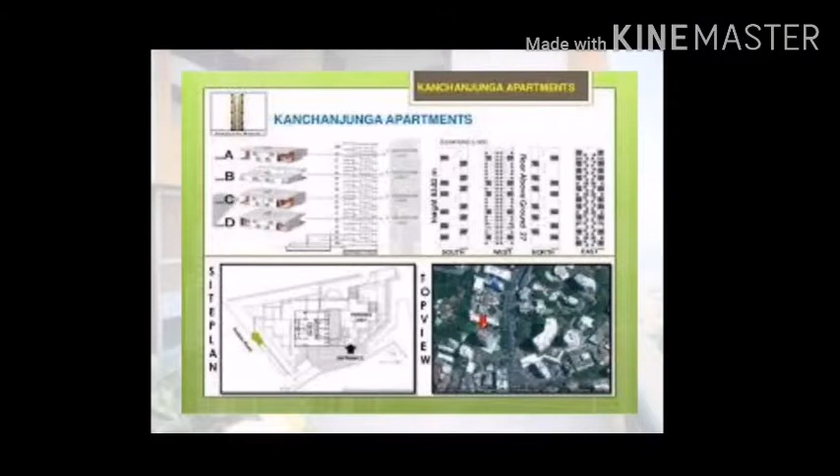My next topic is the work of Charles Correa's first apartment building in Bombay, India: the Kanchanjunga apartment. The plan shown and the Google Map show the top view of the Kanchanjunga apartment, its elevations and plan.

Introduction: the Kanchanjunga apartment project started in 1970 and was completed in 1983. The structure type is a high-rise building, located in Cumballa Hill, Mumbai, India, with a height of 84 meters and 27 floors.

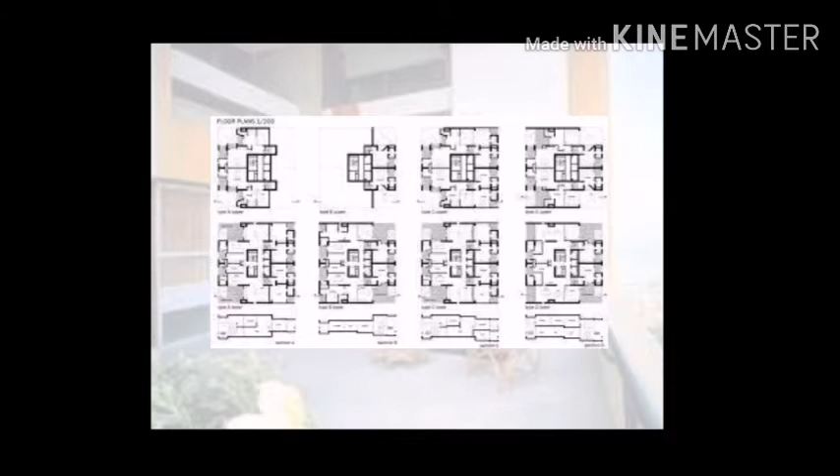The slide shows the various types of plans of categories A, B, C of the flats. Plans and sections of the Kanchanjunga apartment.

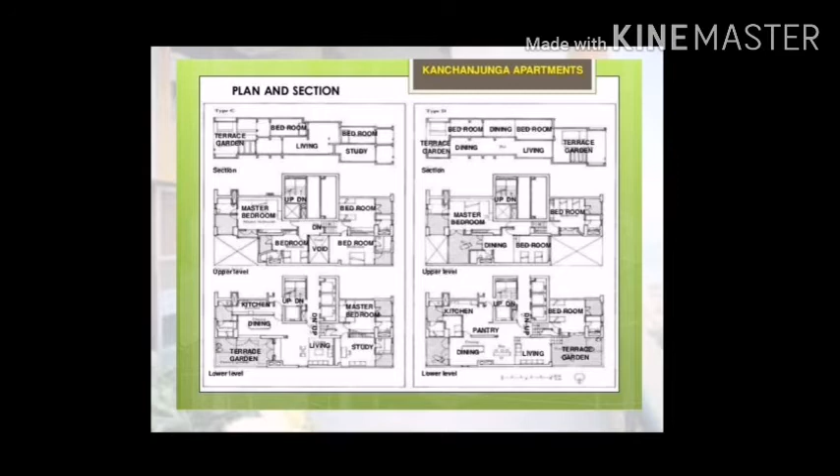The section shows the terrace garden, bedroom, living room, study room, and type D also shows various terrace gardens. Every flat has a separate terrace garden, living space, balcony, and master bedroom, with an internal stair provided for the upper floor, and the plan is like a duplex pattern.

Now I will discuss the infrastructure of this building. The building has been oriented east and west to catch the sea breeze and to open up to the best view of the city.

Unfortunately, these are also the directions of the hot sun and heavy monsoon rain. So the old bungalow solved this problem by wrapping a protective layer of veranda around the main living area, thus providing the occupant with two lines of defense against elements like heavy rain and hot sun.

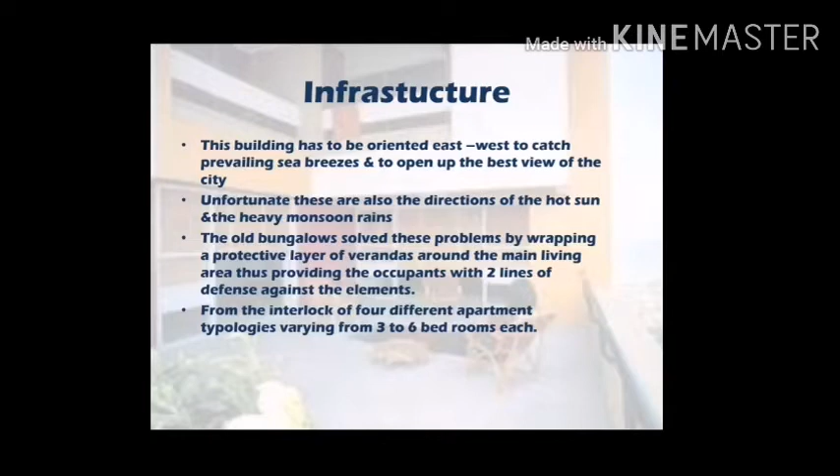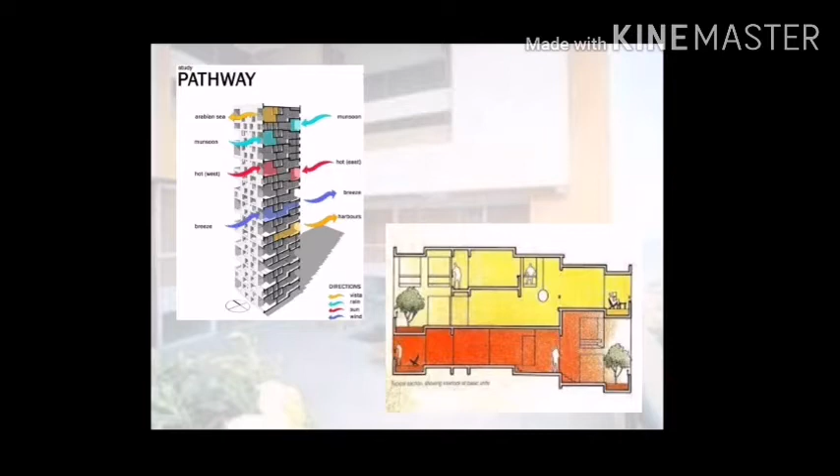From the interlocking of four different apartments, the typology varies from 3 to 6 bedrooms each. The elevation shows the breeze, harbors, hot sun, monsoon, Arabian Sea breeze, and monsoon breeze on the west side, and the section gives the various types of flow of lighting and monsoon air.

The smaller displacement of levels was critical in this work, differentiating between the external earth-filled terraces and the internal elevated living volume. This subtle shift enabled Correa to effectively shield the high-rise units from the effects of both sun and monsoon rain, largely achieved by providing the tower and the relatively deep garden veranda.

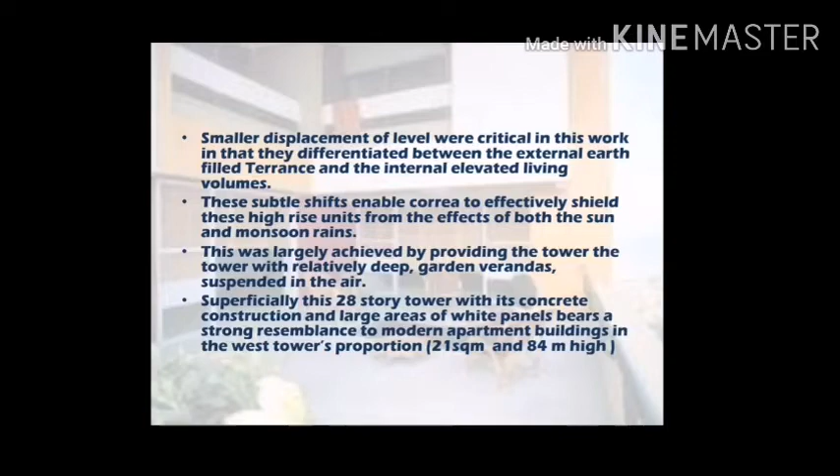Suspended in the air, superficially, this 28-story tower with its concrete construction and large area of white panels bears a strong resemblance to modern apartment buildings in the West. Tower proportion: 21 square meters and 84 meters in height.

The terrace garden is actually a modern interpretation of the features of the traditional Indian bungalow and veranda. So Correa tried to give each apartment one terrace and one bungalow feel.

Each apartment is provided with a deep two-story high garden terrace oriented away from the sun, so as to afford protection from the elements, but also facing the orientation of hot sun and heavy rain, the solution being wrapping a protective layer of veranda around the main living area.

The building has 32 different apartments, 4 types of layout varying from 3 to 6 bedrooms. The balcony shows the interlocking variation, expressed externally by the shear wall and the cantilever portion holding it up.

Again in this slide I will analyze the plan. The building has been planned in east-west orientation, so the west side of the building faces the sea and the east side has a view of the city, which plays a dynamic role for the building.

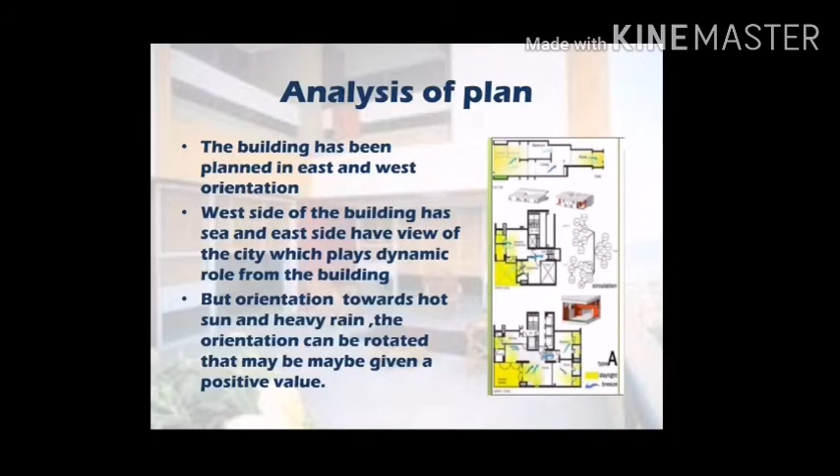But regarding orientation towards hot sun and heavy rain, it can be rotated, which may give a positive value. It is also fine because the veranda gives covering, cool breeze, and comfortable living.

The building also has good access to daylight and breeze through the terrace garden, and the entire building has 4 different types of houses, expressed externally by variation with the shear wall and the cantilever veranda holding it up. The surface cut away, opening up the double height terrace garden at the corner, is a nice idea.

Aesthetics: this part of the building is nice from a point of view of composition using only square and rectangular forms based on basic design principles. The high-rise is viewed from the 4 sides, with corners defined by the veranda, which also gives a good look with comfort.

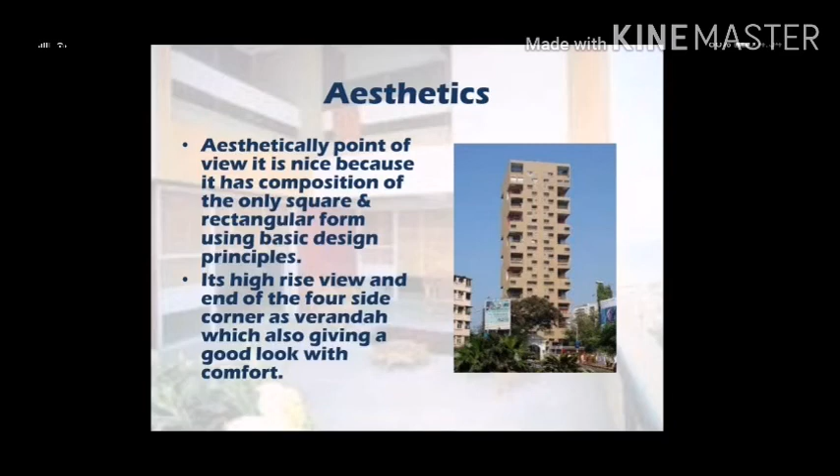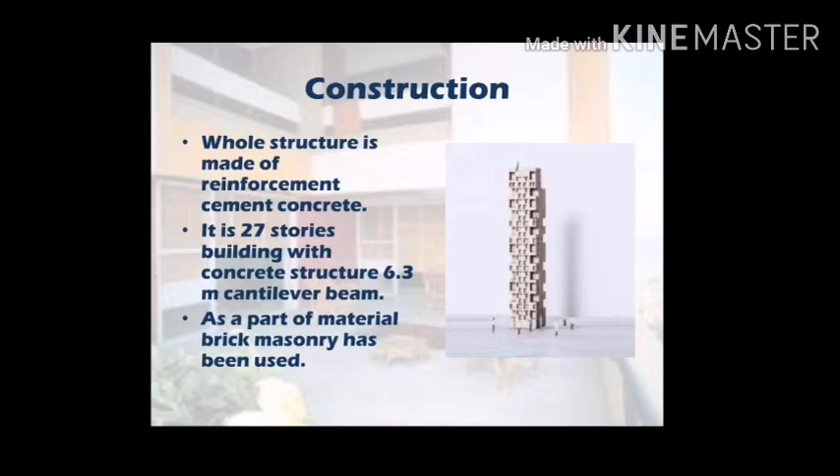The construction of the building is made of reinforced concrete, a 27-story building with concrete structure and a 6.3 meter cantilever beam used as part of the material. Brick masonry has also been used. Thanks.